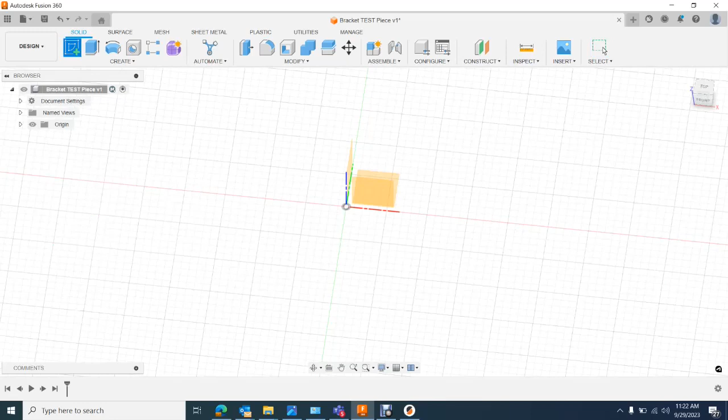So the first thing that we're going to do when creating this bracket, and a lot of the pieces that you'll create and model, you'll always start with the sketch. So we're going to come over here to create sketch, and we're going to left click. From here, all it's looking for is a plane. Typically for a 2D bracket, I'll actually just go over here to my cube. I'll click top down and I'll select and highlight this plane and left click.

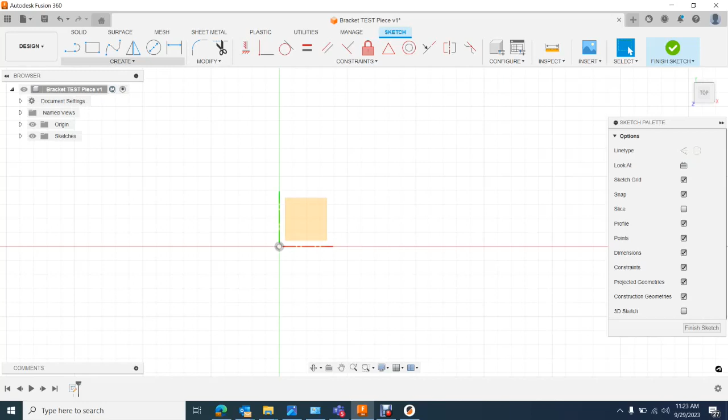From here, it'll actually bring us into our sketch section. And at this point, we can go ahead and actually start making shapes. So for us, we are actually going to be making a bracket. We're going to make this simple. We're just going to make it either a square or a rectangular bracket.

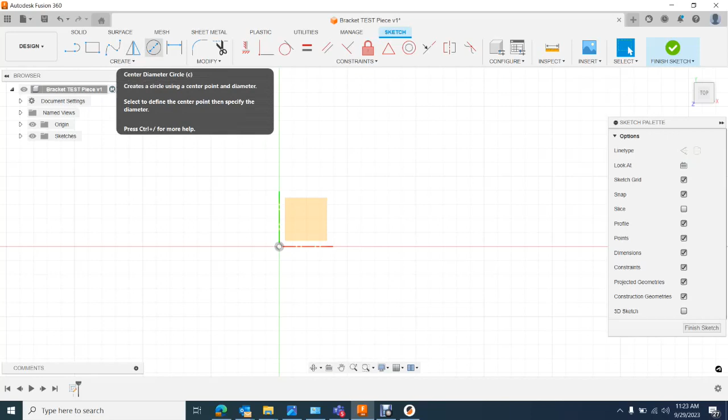You can see up here for the create section, we have a line, a 2-point rectangle, fit point spline, which is a little bit more advanced. We'll talk about that in a later video. A mirror, where you can actually make a feature and then mirror it across a line or an object. That comes in handy a lot, especially when you're building bigger components. And then you also have your center diameter circle and then your sketch dimension.

If you click the drop down list here, you get some more options. You get a point, an ellipse, a polygon, arcs. So there's a lot there. There's a circular pattern. So today what we're going to be doing is building a rectangle. For this particular example, we're just going to be using a 2-point rectangle. But keep in mind, you also have 3-point and center rectangles. In my own work, I usually primarily just use 2-point and center. But there is, of course, a case for a 3-point.

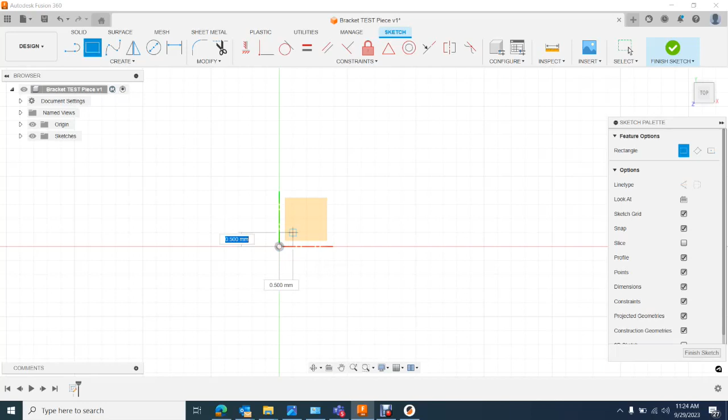So we're going to go ahead and left click on 2-point. You can see now we have our cursor here. As we get to each section in the grid, it kind of highlights it with this blue square. This is where we'll actually place our first corner. So we're going to go to our origin point, which is right here, and we're going to left click. And as soon as we left click, if we just move our mouse away, you can see we're building our rectangle. So there's two ways that you can do this.

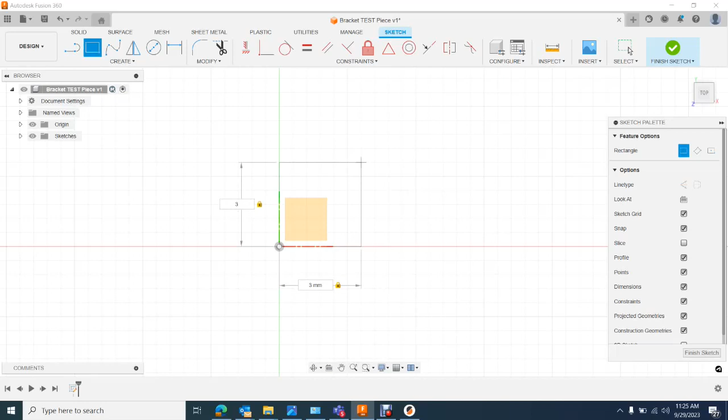First of all, if you see right here, the blue highlighted, it says 0.5 millimeters. We can actually change that to 3 and it will shrink. If you press the tab key, you can tab over to the other. So if we want to do 3 by 3, it'll do it that way. Or what you can do is, if we go back to a rectangle here, you can actually just drag and click it pretty much anywhere you want to.

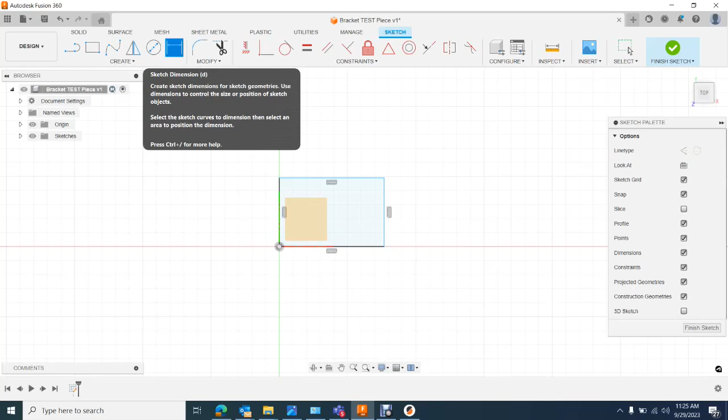And then from here, we'll actually hit D. And what that will do, it will actually bring up our sketch dimension. If you're not familiar with the keys, you can always come up here to sketch dimension and left click. And then from here, we can actually start applying dimensions to our rectangle or our square.

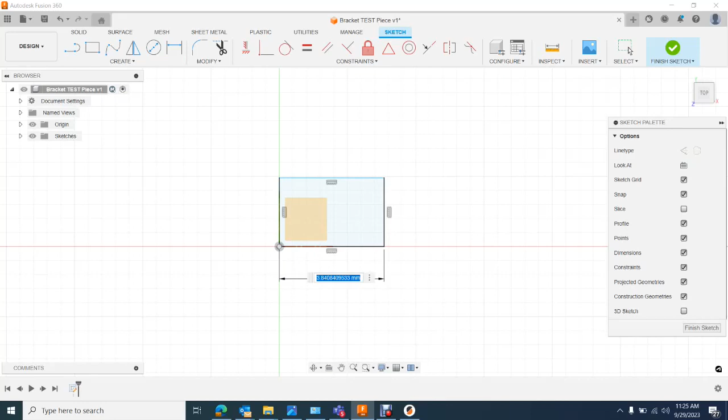In order to do this, we'll have to left click here where it's highlighted blue, and then we'll come over to here, to the other side, and you can see as we drag down, it gives us a distance here. From here, we'll left click, and then we can actually put in our distance. So we will say 4 millimeters here, and then we'll go top and bottom off to the side, and you can see we have 4 millimeters here. So now we have a rectangle that is 4 millimeters by 4 millimeters.

Keep in mind, if you're not familiar with that system, you can always come in and say like 2 inches, and just put an IN at the end of it, and it'll actually go up to 2 inches. If you make a mistake, you can always just come up here to the undo button and undo and get back to where you originally were. If you want to delete this line, you can just select it and click backspace. Go back to D, we'll put in 4 here, and then we'll be good. So that's a very simple way of creating your first rectangle.

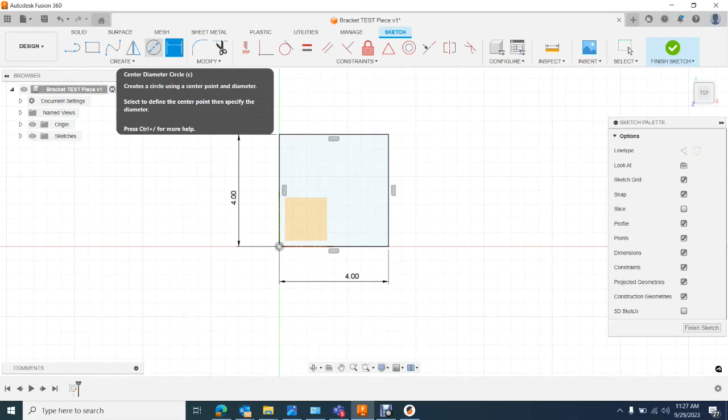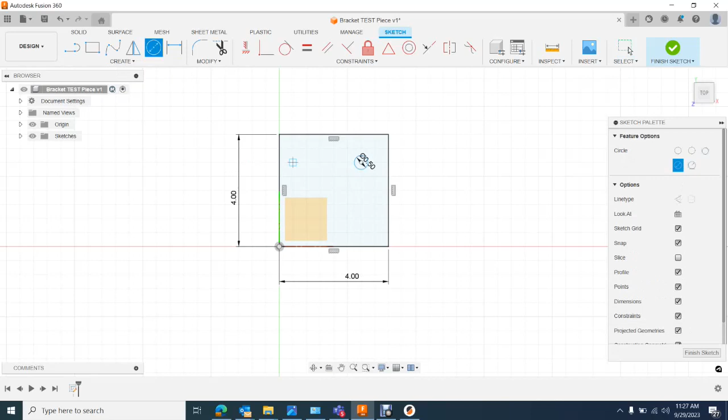The next thing that we're going to do is add some center diameter circles, because we want to put holes in our bracket. So we'll left click this, and we'll come here and left click and drag out our circle. From here, we'll actually say 0.5 here. And then we can come back and repeat 0.5. I'll put one kind of off here because sometimes you won't be able to put them in the exact same spot, and we'll show you how to clean that up here in a second. So we have 0.5s everywhere.

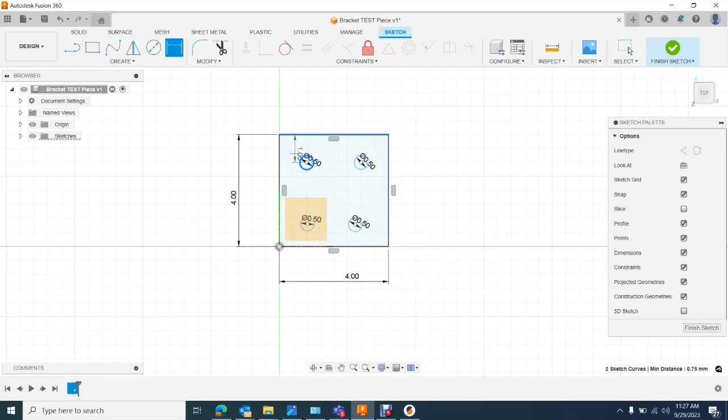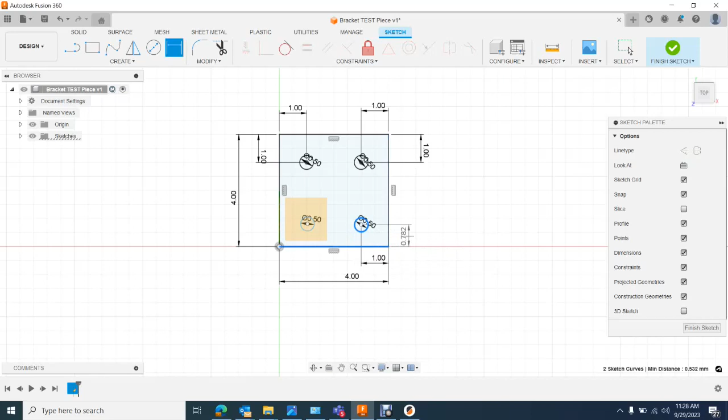Going back to our dimension, so we'll click D. We'll go ahead and dimension the circle at 1, from this way to this way, at 1. And we'll just repeat this process for all the circles. So now you see when we do this, this one will be way bigger. It's 0.78. And we can go to 1 also. All we're doing is basically just creating a dimensional sketch. Once we're done creating this, we'll be able to actually extrude this feature and build our first bracket.

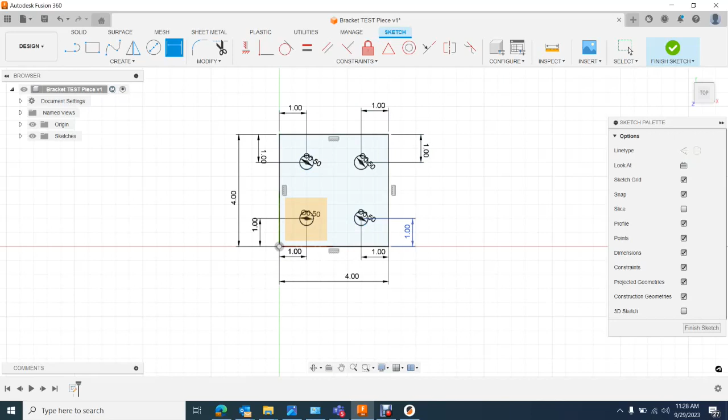So when we're happy with our sketch, you see we have all of our sketch dimensions and all the features that we want. We can go ahead and click Finish Sketch either up here or down here. And we'll hide this origin because I don't want to see it anymore. So now if we zoom around, we have a sketch here. We can hide this sketch with the drop down menu. You see we have a sketch 1. We can hide all the sketches at once. Down here in our timeline history, we have sketch 1, and we can name this if we want to. We can also edit this sketch.

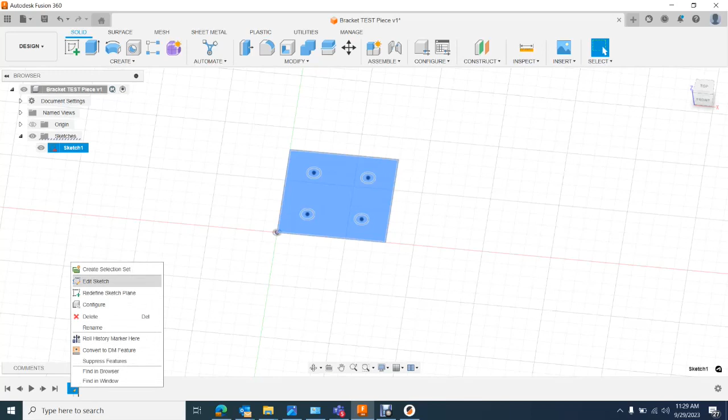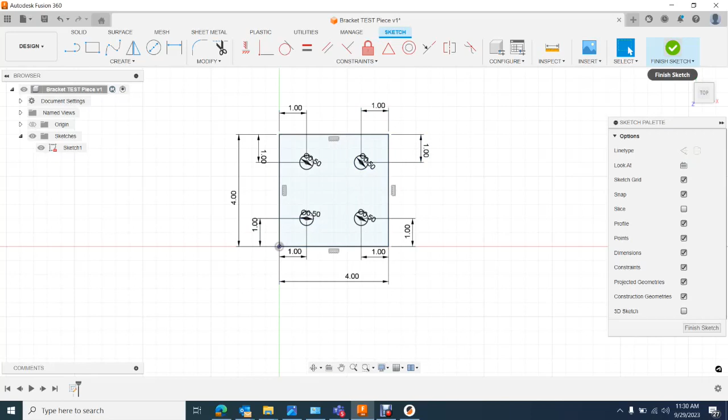Talking about the basics, the two that you'll probably use the most are rename and edit. Rename is just for naming it, so you can always go back and reference it more easily. It just depends on your design flow. Whenever you highlight over this, it'll highlight your sketch for you, so you can find it pretty easily. If I go to Edit Sketch, I can go back in and make adjustments to the sizes of my holes, to the width of my bracket, and so on. That's why it's really important to get in the habit of putting your dimensions in, so that you can always go back and change things really easily. We'll see that a little better in a minute.

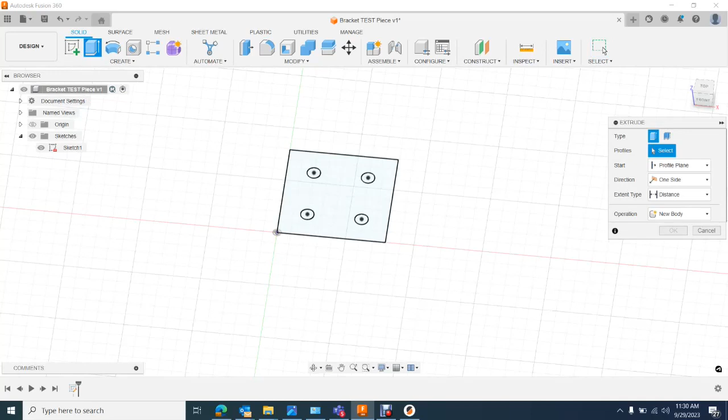So the next thing that we're going to do is come up here to extrude. What extrude is going to do is add some depth to our sketch profile or our faces. So we'll left click this, and you see we have the whole entire profile here. We can also go into each of the holes and build up.

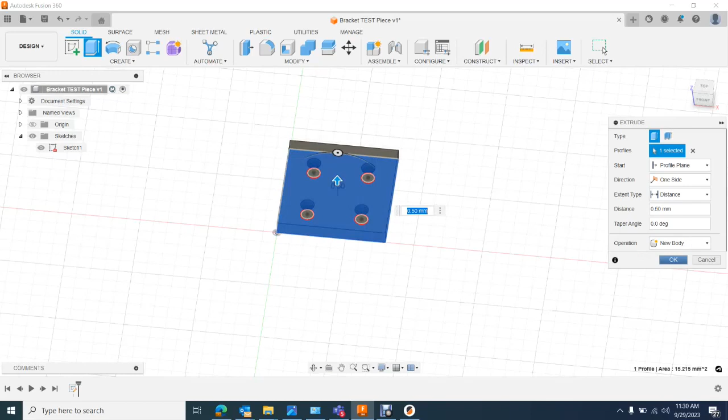I'm going to left click just everything except for the 4 holes, because we want the holes to actually go all the way through. So if I build up 0.5 millimeters, and if I click OK, it'll actually build that as a body. The reason I know that is because off here to the right side where it says extrude, you can add this as a join, a cut, an intersect, a new body, or a new component. Right now, it's just going to make it a new body.

If we wanted to make it a component, we can. The difference between those we can talk about at a later date, but for our case, we can go ahead and just click new body. Also, from over here, we can extrude only one side, like going up, or two sides where you get two arrows to where you can build both ways. And then, of course, a symmetric where it does it on both sides equally. For our case, we'll just do one side. The extent type will just be distance for right now.

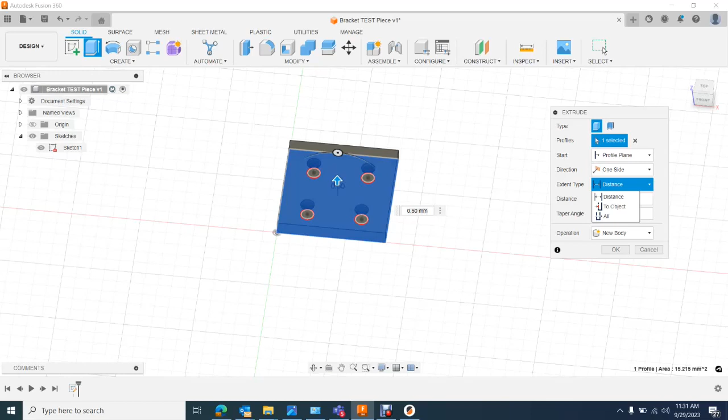Now, if I was extruding this to another object to connect a piece, I would click to object or just go to all. But we're just gonna go ahead and click OK there. So now you see we have a bracket. Like this is actually technically a completed bracket. Of course, you can round off corners and stuff if you want to, but this is a bracket.

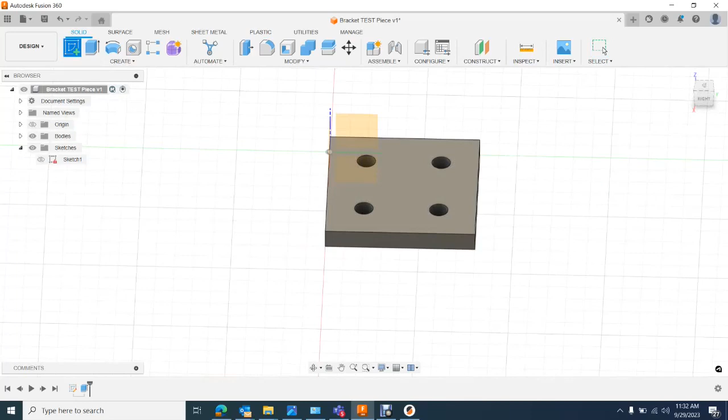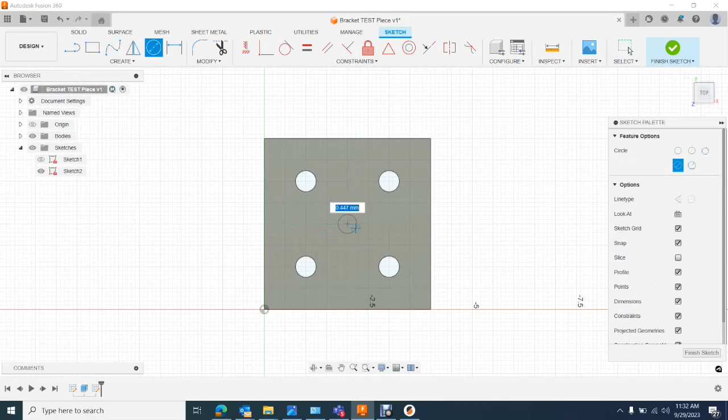Moving a little bit further on for this video, we're going to go ahead and create another sketch. And instead of the plane being on this origin line here, we're actually going to make the new plane on the face. You see it kind of rotated on us, so we can come up here on the right side to click to rotate, kind of get that straight back up. Click top, so we're top down, and then we're actually going to create, let's just say, another center diameter circle in the middle here, and we're going to make this guy 1 millimeter.

You can see it's kind of in the center, but we're not sure. We can always go to dimension, go to 2 here, and 2 here. That's one way you can do it. Another way is making it concentric up here to our constraints, which we will talk about later, but you can make it concentric to the center point, which will bring the circle in the middle. But we will talk about that at a later date.

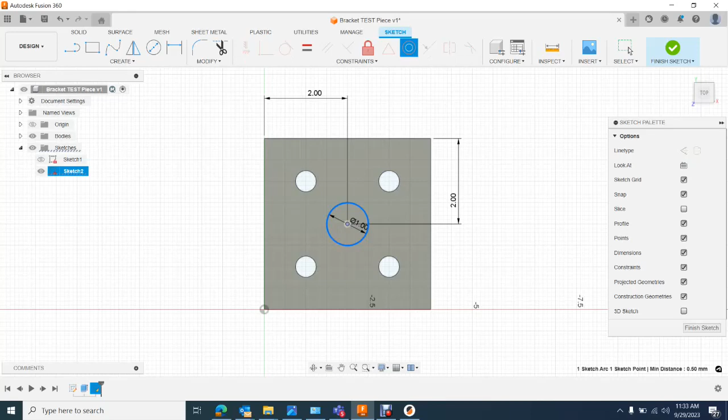So now that we're centered up here, we can go ahead and go to Finish Sketch. And you can see now we have a sketch here that's a circle on top of this face. You can see if I hide that sketch, I don't see that circle anymore. So now we have 2 sketches here. We have 2 sketches down in our timeline. So we'll go ahead and unhide this.

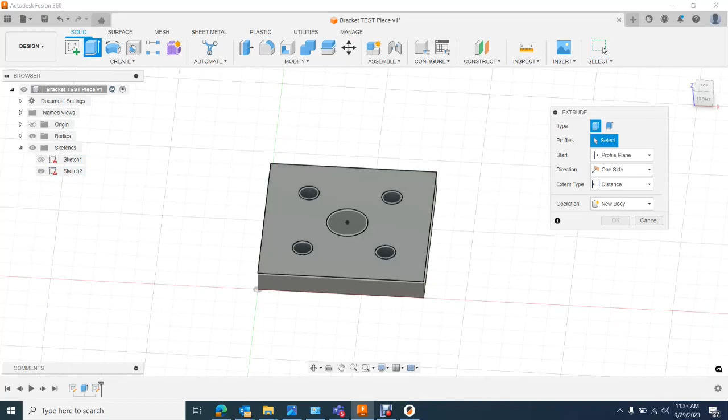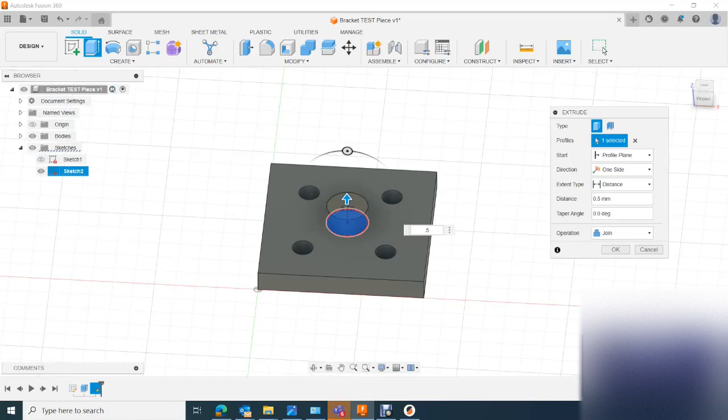We'll go to Extrude. We'll click this feature in the middle. You see how it highlights blue. From there, we can actually just drag up, let's just say 1 millimeter. Actually, let's just say 0.5. And you see now we have this join highlighted. So if I join this together, it'll actually make the original bracket face and the actual part all in one.

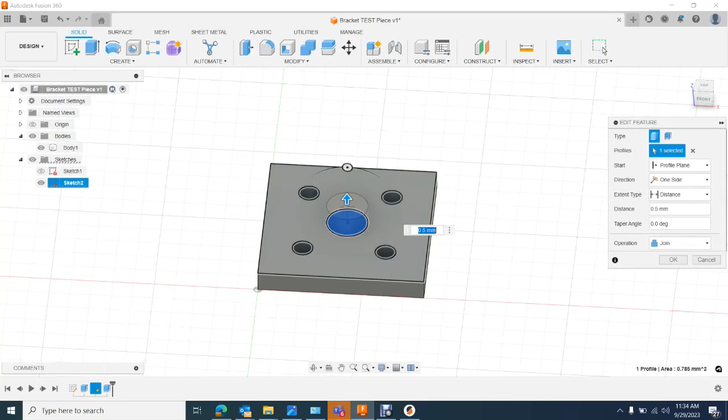There's other ways of actually assembling joints and components in rigid groups, but that's a later video, more advanced topic. So in our case, all we're going to do is edit feature. We're going to join this and click OK. So I hope you guys enjoyed the video. This was just an introductory to getting started in Fusion 360, making a bracket.